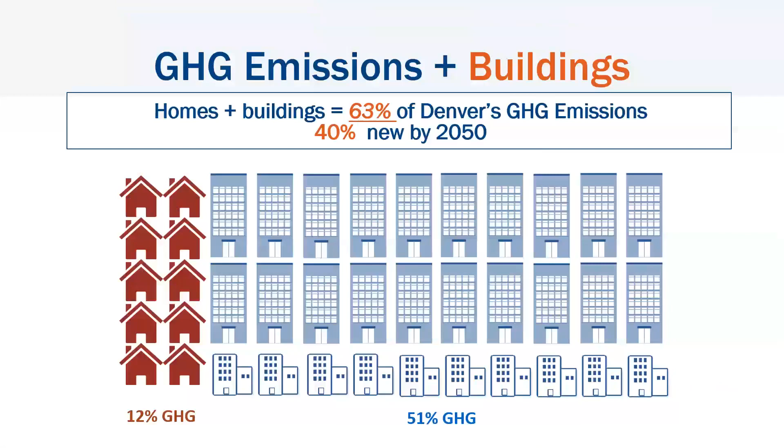Greenhouse gas emissions are central to that. We know that homes and buildings in Denver contribute 63% of Denver's greenhouse gas emissions, and we also know that by 2050, 40% of the buildings standing at that time will have been built between now and then. So we know that new buildings matter and that codes matter.

That's not to say that we don't also know that existing buildings matter or that cleaning up the grid matters. Those are two other efforts that our Office of Climate Action, Sustainability, and Resiliency are very actively taking on. We're just not talking about that today because the code doesn't really deal with that directly, but know that that's happening also. So as we focus on new buildings, the existing buildings and the grid are also being worked on.

Through our work, we are trying to get to a point where performance is considered from the very beginning of every project, when the site is being selected, alongside aesthetics. Not that it waits until we're part of the way down the road and we've gotten through most of schematic design or we've fallen in love with what the building's going to look like, but the performance is on the table from the very, very beginning.

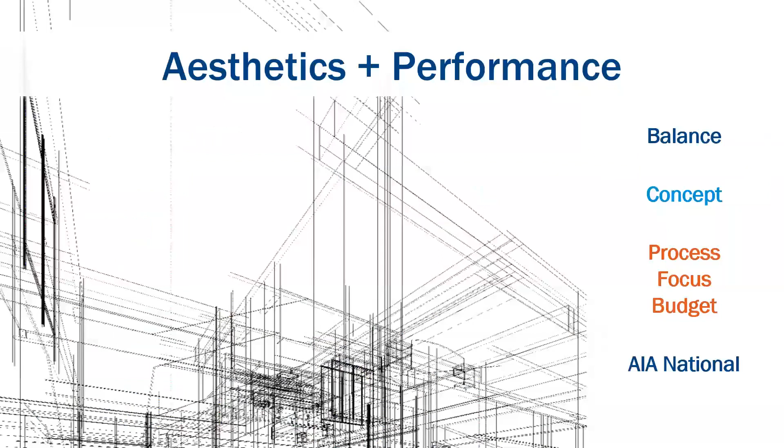That's not a new concept. That's something that the AIA tasked our industry with years ago and put into the Code of Ethics. We are just adopting that more strongly in Denver and more actively.

We know that regulations can't advance without the market advancing at the same time in tandem, so we have an ongoing dialogue with the community, and this will be an ongoing collaboration. I would say 200 times in a longer version of this presentation that we are doing this in conjunction with the community.

It's important to acknowledge the role of the Office of Climate Action, Sustainability, and Resiliency in all of the work we're doing. They do a lot of the work that creates the plans and sets the goals. They existed for years before now. At the beginning of this year, they got created as a separate office that reports directly to the mayor, but previously they were part of the Denver Department of Public Health and Environment and had the same team as the climate action team. There are 13 people, but they're growing, and the reason why they were broken out as this separate entity is because the community worked in direct conjunction with the mayor to make this happen, because climate matters.

The first thing the mayor did as a plan that got rolled out, he did 2 years ago now already, which was to roll out the 80 by 50 plan, a commitment on the part of our city to decrease our greenhouse gas emissions 80% below 2005 levels by 2050. That's a really high aspirational goal, and we are working towards making plans that will allow us to achieve that goal.

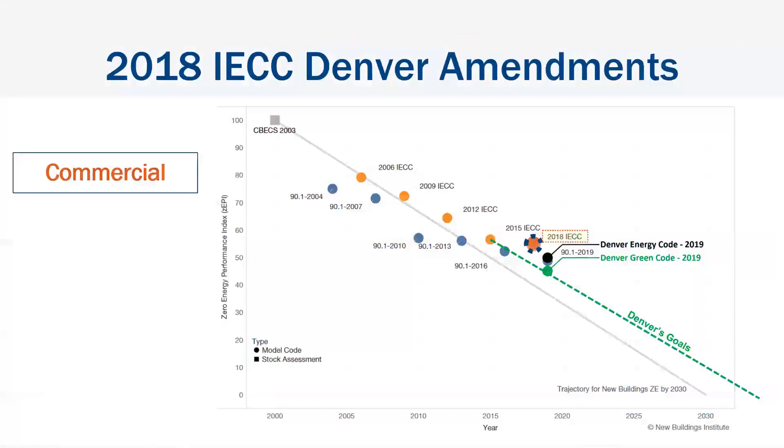We are focused on the building outcomes. We know that the design phase matters, the construction phase matters, but ultimately the outcome is what matters the most, right? It doesn't matter how a building is designed if it doesn't perform the way it's intended to perform. We're also focused on continuing to push forward with the Denver amendments to the IECC. This graph shows that the IECC at the national level is not on track with Denver's goals for commercial buildings or for residential buildings.

So we need amendments to pull the code in alignment with our goals. That is what we are doing over each code cycle. In this most recent code cycle, for the 2019 Denver amendments, we used it as a learning opportunity.

We worked with our committee, we looked at each amendment, we took the ones that the community felt were doable. We got to about 15% better than base code, and that's good, but it wasn't even enough to get us on our trajectory entirely. So we know in future code cycles, we're going to have to work to a goal. We'll have to look at each amendment, but we'll also have to know as a committee that we're working to a goal, and we have to figure out how the community can most painlessly do that and what resources the community needs to get there.

We're also using the voluntary green code to introduce to everybody the things that we think are most likely to be considered to be moved into the mandatory code in the next code cycle. So it's not only an opportunity for projects to show exemplary leadership, but it's also an opportunity for everybody else to see what's under conversation and potentially will impact all projects in the mainstream in the next code cycle.

So I won't go through any of the specifics related to the IECC amendments because that's what the rest of the 2 hours are for. We know what all of the usual suspects are that we have to target through our amendments. We know that we have 5 code cycles and that as new technologies come out on the market, we're going to respond to that.

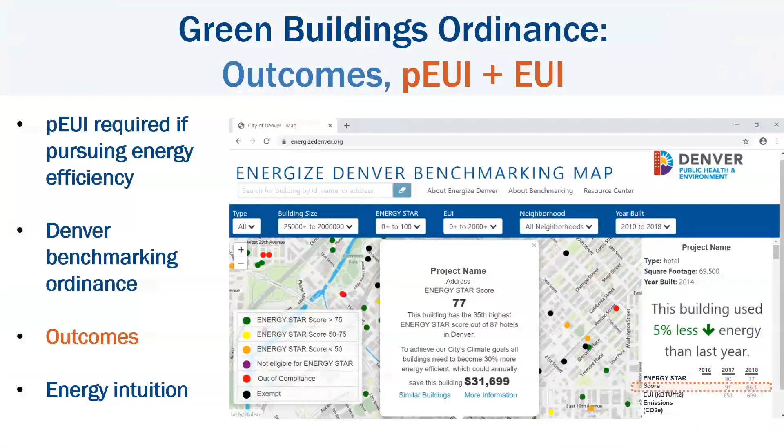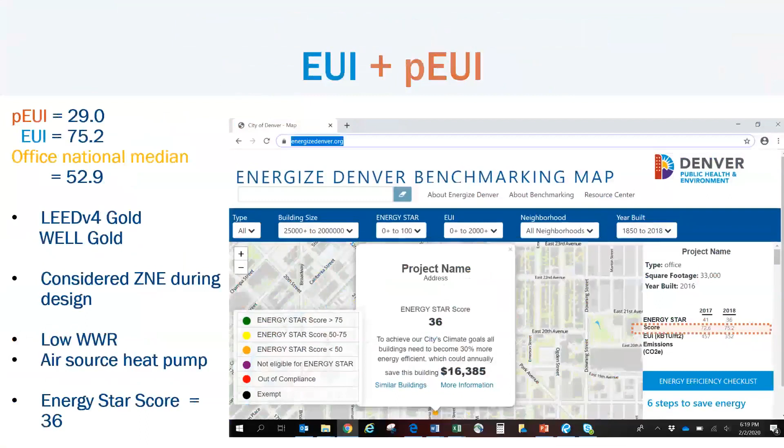We're using the Green Buildings Ordinance to start to have more conversation with our teams about predicted energy use intensity and actual energy use intensity on buildings because we really care about outcomes. The reason why we're doing this is because we want teams to develop an intuition about how their buildings are going to perform. We're seeing from anecdotal test cases that the predicted energy use of our buildings in Denver is generally a quarter to a half of the actual. So that's a big gap.

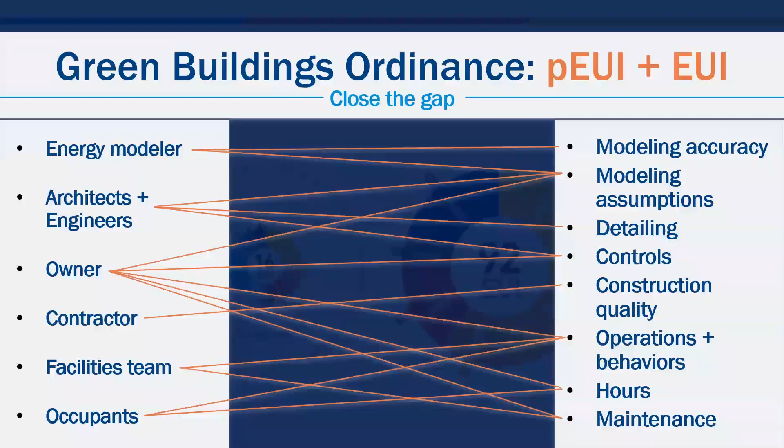That's not to say that teams are bad. There are a lot of factors that go into that. It goes from start to finish on a project, including the occupants. So we need to get everybody involved so that our buildings start performing as they're intended to. Ultimately, that's just for the base purpose of supporting the health and welfare of our citizens.

So then the last thing to say is just a reminder that we see equity, affordability, and sustainability as one goal. We're collaborating across a broad variety of departments and agencies within the city. The Zero Net Energy New Buildings Implementation Plan, getting all of our buildings to zero net energy by 2035, is one piece, but we're looking at bigger scale pieces at the site level as well, at the planning level. We are looking at existing buildings and neighborhoods and at the whole city level.

And we're looking to teams to have more focused conversation on energy, to start looking at metrics, to be accountable and responsible for the performance of projects, and for every member of a project team to get engaged in the conversation about how a building performs.

We're also looking beyond the code. So if there are things you're thinking of that other cities are doing, know that we're probably talking about them because we're talking about a lot of the other pieces that also impact and support higher performing buildings in a community. We're looking at planning opportunities, broad-based sustainability in the design of buildings, and ultimately how projects are going to contribute to the future of Denver as a viable community and a place where residents can live happily, healthily, and equitably.

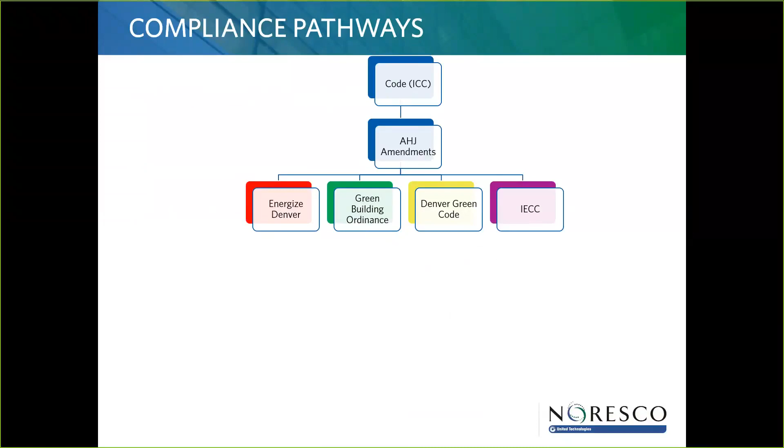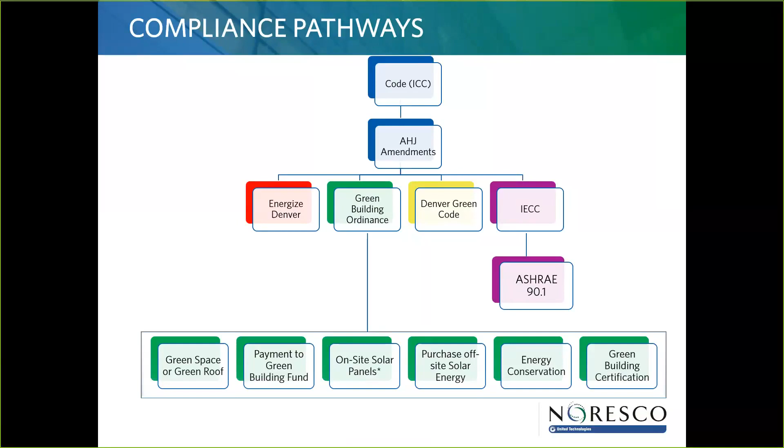I can get my screen to change, okay. So just a little snippet of what that looks like - you can see this tree starting to grow based on the different amendments or changes to these AHJ requirements. You can see Green Building Ordinance has several of its own, the IECC has ASHRAE, and if you go further out - I didn't put everything in here - you can see the tree starting to get pretty wide pretty quick.

There's definitely different pathways, so this is what trips people up quite a bit. We want to make sure no one intentionally tries to not follow the code, but I think where we get tripped up is there are so many pathways that it's hard to keep straight what pathways we're following and making sure we hit everything that's required.

The good thing with the City and County of Denver and their plans reviewers is that they only have to remember Denver and what Denver amendments are. The not so good thing for the rest of the architectural community is they'll have to remember all 300 AHJs' amendments, because they design in several different cities and counties. So it's a little bit more tricky for them, and keeping things straight is hard when you have more options.

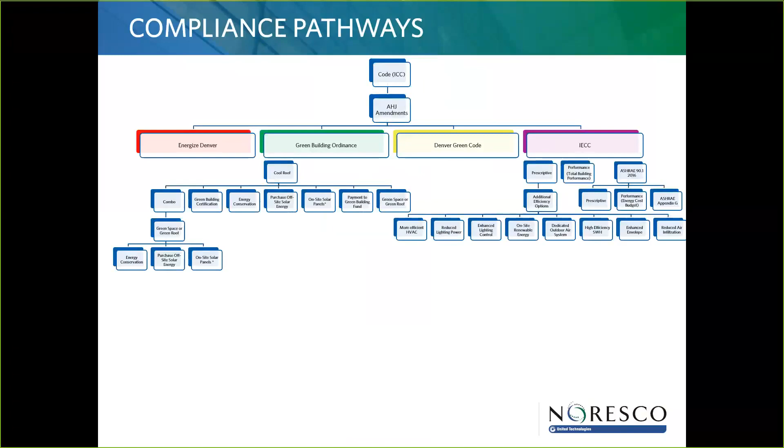So just real quick, on the Green Building Ordinance - we're not talking about that today, but you need to know some of this because it affects some architectural items in the code.

So here are the pathways. You have to have a cool roof plus one of those 7 options. Then you can see you can have a combo option, which breaks down even further.

Denver didn't do this on purpose. It just so happened this way. I think for the most part, Denver and their task force tried to line everything up as best as possible. But this is one item when you're looking at your roof SRI that could be a little bit different.

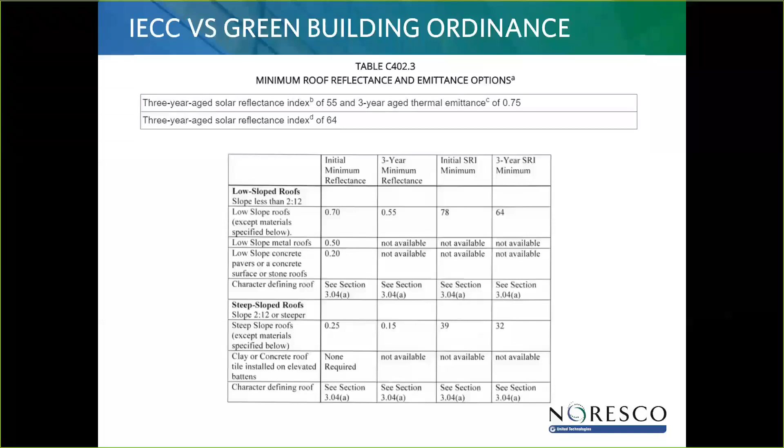So methods of compliance, in the IECC, there are 4 different ways to comply with this. I'm a visual person, so I'll just break it out here. They have to clearly be marked on the set of plans.

And the thing with new buildings is that whatever pathway is selected, that pathway then has to be followed for the rest of the life of that building. So say a building comes in for permit for core and shell, and they pick the ASHRAE Appendix G pathway. They then, for the rest of the life of that building, anytime they pull a permit, would have to follow Appendix G, the ASHRAE Appendix G pathway.

They can't jump over to, say, IECC or even ASHRAE prescriptive pathway. They have to follow the same pathway for the life of that building. And the reason for that is that not every pathway is created equal in terms of energy savings or energy consumption. And so if you start to mix and match these pathways, the building energy use or conservation of energy starts to go out the window.

You sometimes might be doing something better, but in the overall building might be taking a hit in energy consumption. So that's why City and County of Denver is going to require that the same pathway be followed for the life of the building.

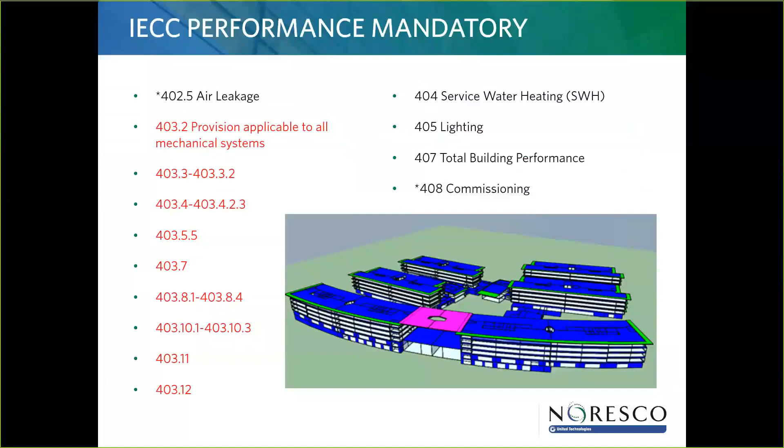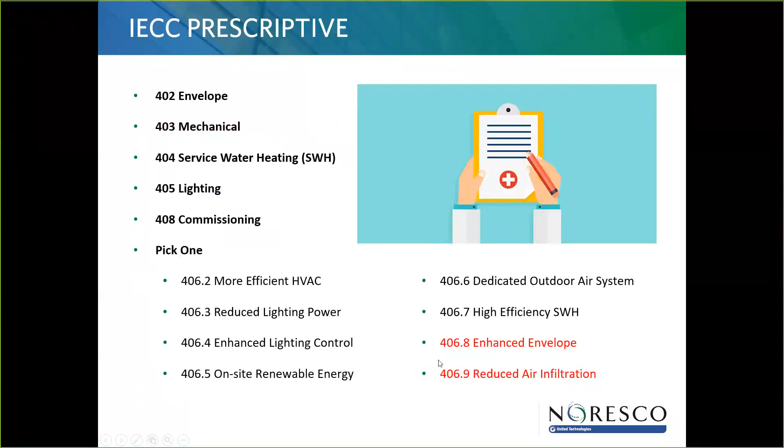So those are the sections we're going to follow. If you're looking at the prescriptive pathway, the items in red are the new items - enhanced envelope, or when I said Denver amended this 'pick one' section, you now have to pick two. Last code cycle had 6 options to pick from; this code cycle you have 8 options to pick from. And with Denver, you have to pick 2 of these 8 to do. We'll go into more detail on those.

All right, so let's jump into it. Let's jump into windows. We're in climate zone 5 here in Denver. So you can see if you look at the chart, there's different climate zones based on what climate zone you're in. Sometimes Colorado has more than one climate zone, but for City and County of Denver, we only have one climate zone, which is climate zone 5.

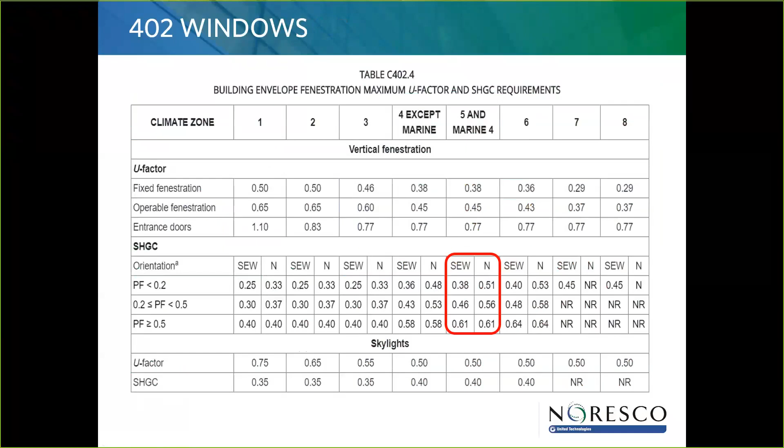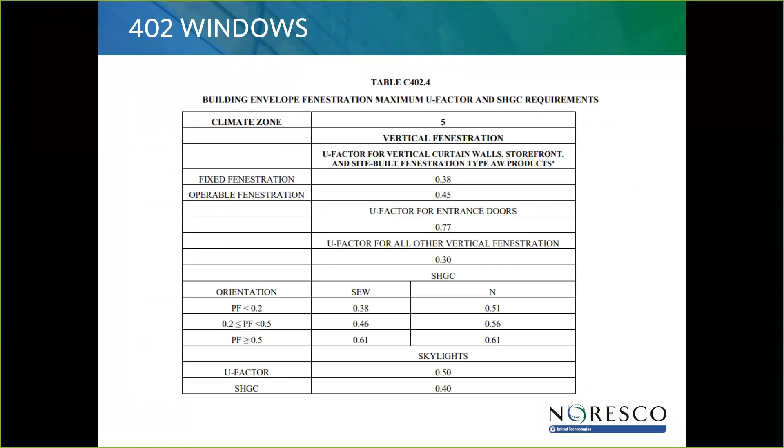The little red box there is all that's really changed from 2015 to 2018. Pretty simple change there. I will say Denver, in their amendments, did make this a little easier to read. So this is what the code shows you, this table. But what Denver did is say, let's get rid of all the other climate zones to make this easier for people - we don't want people to be confused. So this is the new table for City and County of Denver. They didn't make any changes to the table that were different per se than what we pointed out on the last slide.

So they're not doing a bait and switch or anything here, but there were changes from 2015 to 2018. Just so you can see the difference, here's a little chart - again, the red is what's new. You can see the difference between 2015 and 2018 IECC, it's just these things in red. In ASHRAE, nothing's changed. And then Denver made one amendment for entrance doors and other fenestrations. So hopefully this slide gives you a little update. I don't think the solar heat gain coefficient is going to be a deal breaker in terms of budget.

I think these solar heat gain coefficients were looked at pretty closely to make sure the industry has these windows and options readily available. It's not a premium option, because if we're going to require somebody to do above and beyond based on a Denver amendment, we want to make sure it's the biggest bang for the buck. You'll notice these solar heat gain coefficients are pretty readily available in the market to find.

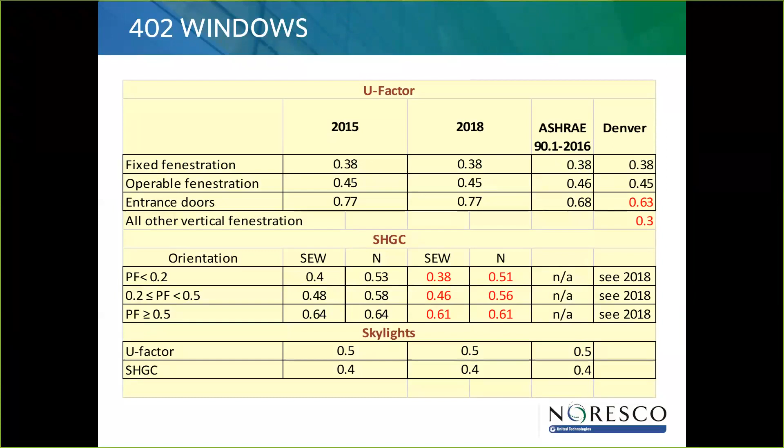I'm going to jump back to section 202, a little out of order, but it's in order for the presentation, to go over some definitions so we're up to speed. The red asterisk there shows Denver amended the definition a little bit here, and what they amended was the language of it.

It basically better defines what an above grade wall is. A wall associated with the envelope, 15% or more above grade, and on the exterior of the building, or any wall associated with the building thermal envelope that's not on the exterior of the building. So you can still have a thermal envelope that isn't on the exterior of the building, it could be on the interior. We want to make sure that's captured in the above grade wall definition.

So what that basically means is above grade walls, and spandrels, the spaces between floors, are now considered to be above grade walls. We need to make sure the insulation values there match what the above grade walls require.

This is a little bit different. If you think about balcony slab edges, those would technically fall into an above grade wall in some situations, which would then need to be insulated somehow. Just know that this definition change, being a little bit more clear, adds potential areas that will need to be brought up to an insulation R-value level that you normally wouldn't focus on from an architectural standpoint. Keep that in mind.

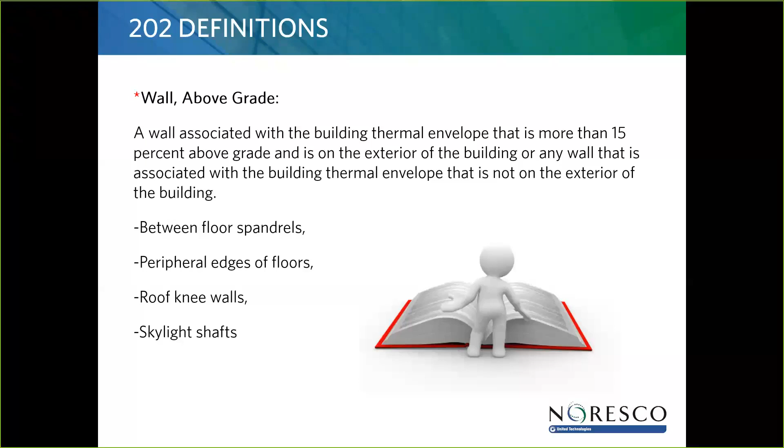The other definition I want to go over is Group R, multifamily. R2 is now considered commercial in the Denver Amendment definition. So no matter the size of multifamily, those are now considered commercial projects and have to follow the commercial provisions of the code in Denver. That's a big change.

Let's get back to the envelope and R values. Here are your above grade walls, the big table of different climate zones, climate zone 5. Nothing's really changed from the old code to the new code in terms of how much more R value you'd need in the wall. Just remember the definition of above grade walls changed, so some of those locations might need to be brought up to those R values. But the change from 2015 to 2018 is in that little red box, and that has to do with heated slabs.

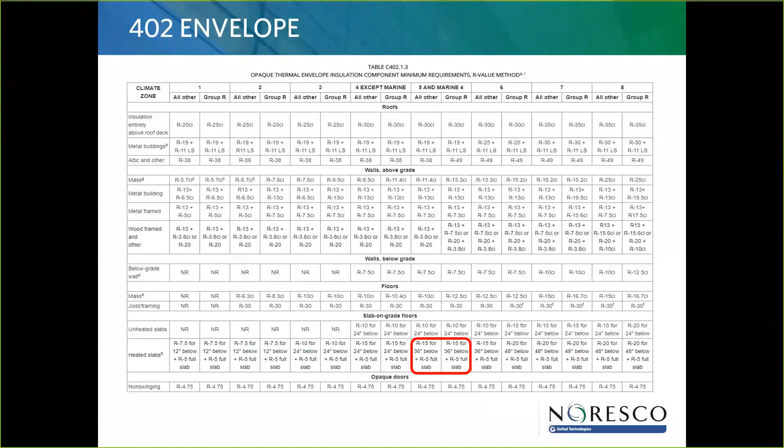Again, trying to make this a little simpler and easier for everybody to read. You can see the changes from 2015 to 2018, and then the changes from ASHRAE. Again, nothing's changed from one version to the next except for that heated slab, and Denver's amendments didn't change any of that. Just keep in mind that the areas that might need to be insulated have changed based on the definitions.

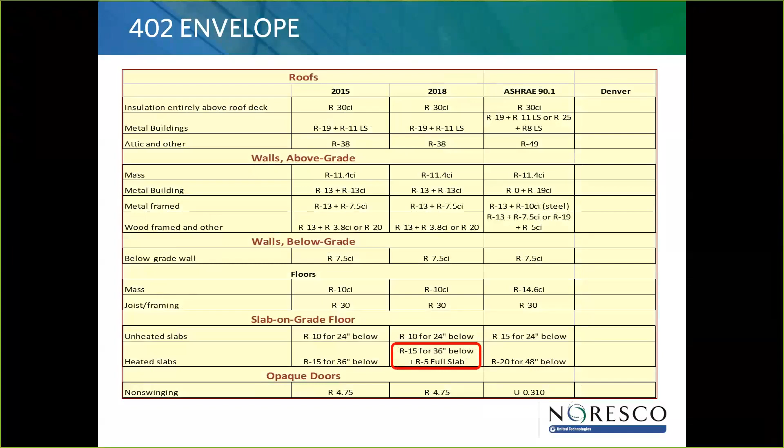Heated spaces between slabs and drop ceilings, like in a parking garage type scenario, have an amendment to them. Denver has amended this to add a section saying that if we have a space we're heating, because maybe there's a wet sprinkler pipe in there requiring a drop ceiling in the parking garage, and that space has to be somewhat heated, we want to make sure that's within a thermal envelope. Because we're using energy to heat that space, we want the envelope to keep that heat in and thus use less energy. This is a tricky space, so Denver has called this section out because of that.

So what they're saying is the slab must have a minimum of R5 insulation, and the plenum floor, so if you have drop ceiling tiles, must have a minimum of R19 insulation on top of that.

That will then suffice to be enclosing that soffit space, that drop ceiling space, within the building envelope. So it's a little bit hard to seal the drop ceilings, but you're more than welcome to make that your building envelope and try to seal that. But Denver's found that over the years, with maintenance going up there and checking things, or people popping their head up, or maybe leaks, that envelope kind of gets beat up and not put back in place. Same thing with some batt insulation laying on top of the drop ceiling. But it just needs to be installed there: R5 on the slab, and then R19 on the drop ceiling.

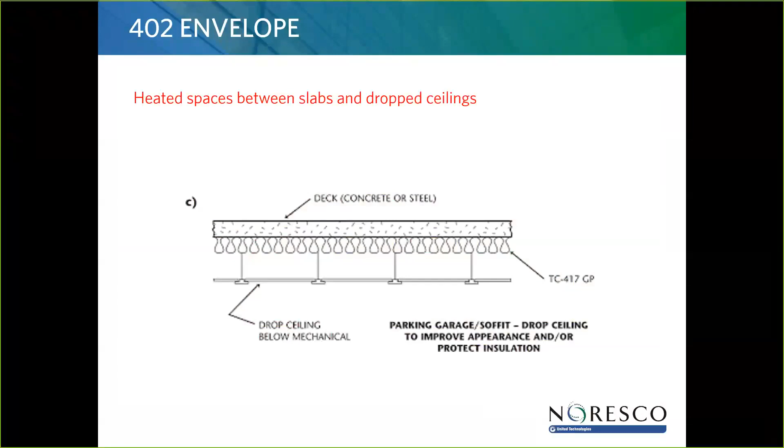This is a mechanical section, but it applies to architects because of the radiant floor heating insulation requirement. You might need to accommodate for that. You now need to have R3.5 anywhere you have radiant floor heating, so that might need to be something you incorporate in your plans or when you're planning your drawings. That's why this section is in here. So if you're following the ASHRAE path, no matter if it's Appendix G or prescriptive, you will have to have this in there.

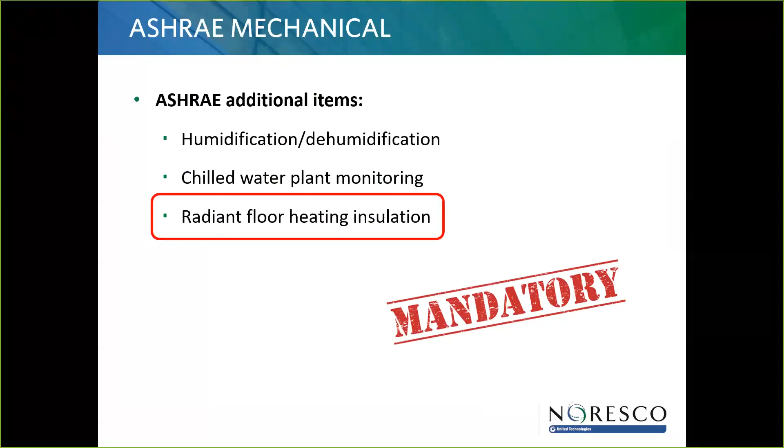Skylights. Skylight curbs before didn't have to be insulated previously, but now, because of the above grade wall definition and the change in the code, they have to be brought up to an R5. So just know that the curbs have to be insulated. And then any shafts that come up through the roof line there would be considered above grade wall, and then have to be brought up to the insulation value of what your wall R value needs to be. So changes to the code, and because of the change to the definition, some additional insulation requirements are now required on there.

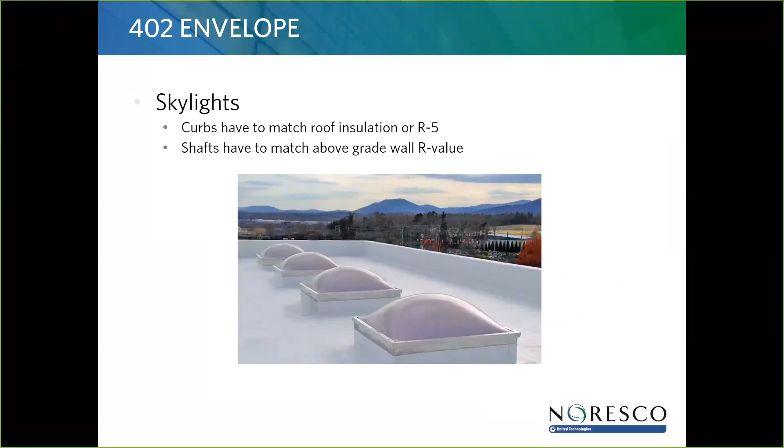All right, so let's talk about insulation on those walls. We know what our R value needs to be in our wall insulation. However, in order to try to reduce energy consumption even further, Denver made an amendment to reduce thermal bridging. If you have thermal bridging, you're allowing heat to transfer from the outside to the inside of the building via metal or wood studs, or some sort of bridge, if you will. Denver has amended a section to say if you're using Z-girts, you're going to get penalized a little bit because of thermal bridging.

Now, you can avoid being penalized if you do certain things, but what they're trying to do is eliminate the thermal bridge. So if you use vertical Z-girts, they're saying that whatever your wall R value is, you're going to decrease that by 40%, and that's going to be your effective R value of that wall. So say the R value of your wall has to be R13 - if you have vertical Z-girts, take 40% off that, and now you don't have R13. So effectively, you need to put more than R13 in that wall system to bring your wall system back up to R13. Same thing goes with horizontal Z-girts, except it's a little bit less of a penalty - instead of 40%, it's a 30% decrease in R value. But if you use intermittent Z-girts, then you don't have any penalty in R value.

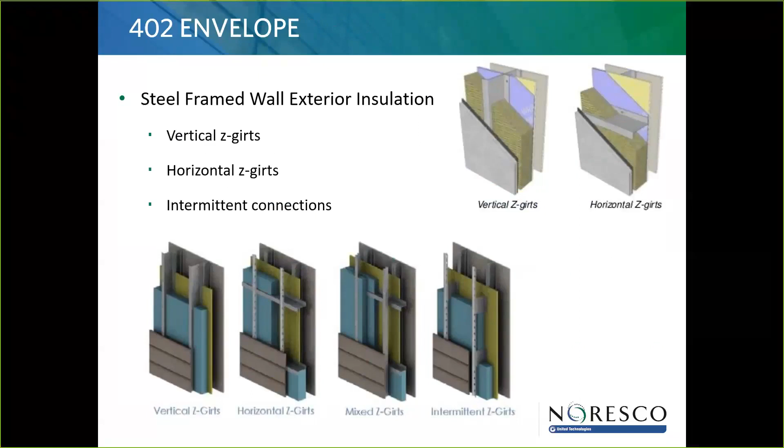All right, so that's basically, in a nutshell, the changes from an envelope standpoint. I will say that section 402, the envelope section in the code, is pretty small in comparison, in pages, to mechanical or modeling or whatever. But in my opinion, it's the largest effect on our energy consumption and energy use. And up until recently, people haven't thought about the envelope as being a contributor to energy usage, and so now we're seeing a lot more emphasis on that.

Our mechanical systems are getting to a point where we're getting as good efficiency as we can, given the technology, and the incremental steps of increasing efficiency are very small. So now our weakest link in our buildings is our envelope. Our mechanical equipment and energy consumption is only as good as our building envelope. If we're letting heated and cooled air in and out of our building because our envelope isn't airtight, we're not focusing on the right thing.

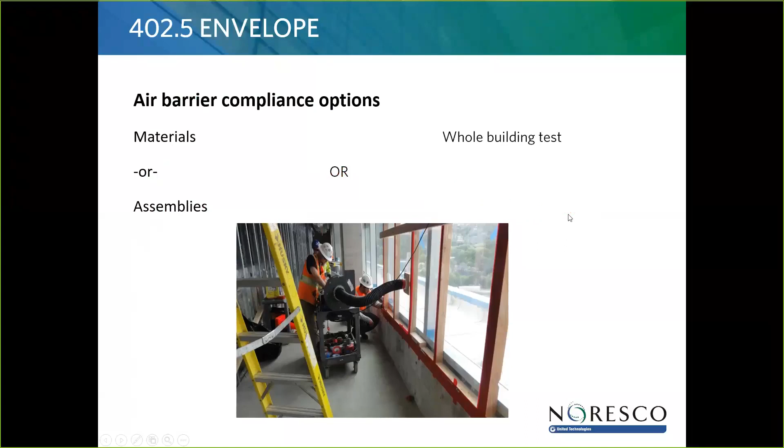So let's take a look at what that means. Materials or assemblies — you have to pick one of these options. Your materials for your air barrier have to meet the ASTM standard, or your assemblies have to meet the ASTM testing standard. So you can pick one or the other.

What I see doing from an ease standpoint is if your spec calls out that your air barrier materials are ASTM E2178, you meet this compliance option. But from a building performance side, that's probably not the best pathway. I'd say the best pathway is knowing that your building is performing to these standards, so your assemblies would test that — your roof-to-wall connection, your window-to-wall connection — those assemblies would be tested and meet a leakage requirement. So you have two options there.

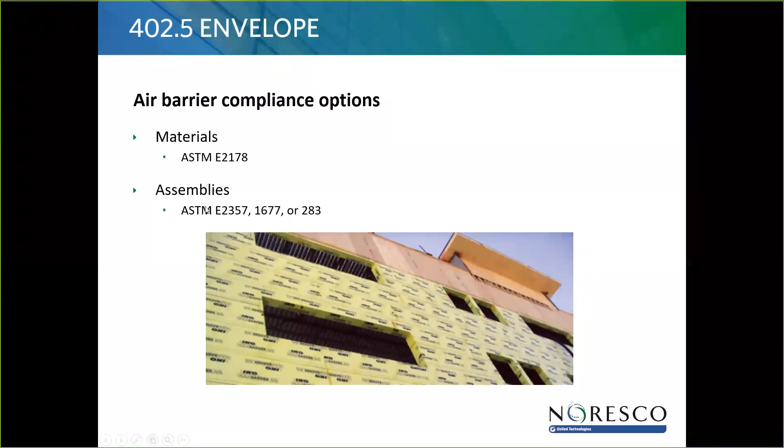Going back to this slide — materials or assemblies — and you would then have to do a whole building test. So let's go look at what that whole building test looks like.

So your whole building test, someone would come in, a third party or an approved agency, and set up a blower door test to see what kind of leakage the building has. This would be done after the building envelope is completed. That does no good if you're still missing one window that's not put in or something like that. The whole envelope has to be completed.

Now, it doesn't mean you have to have your facade up. You can still do your building envelope test without a facade up. And actually, I would recommend that, because if you don't pass, then you have an opportunity to address and fix that and get your building envelope where it needs to be.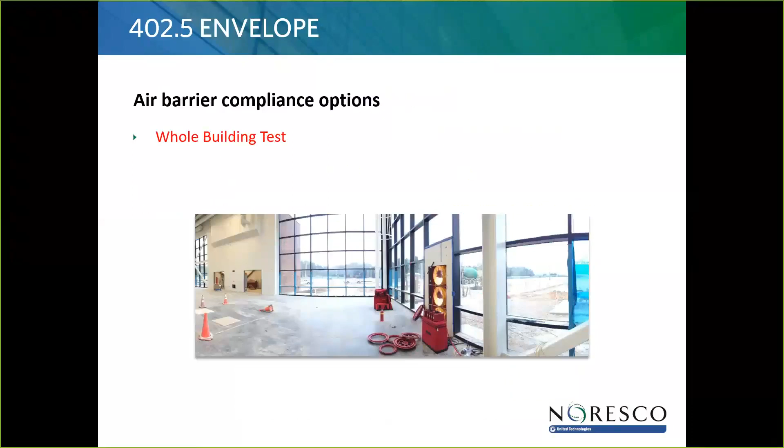So what's that whole building test look like? Basically, you're following another ASTM standard, and that standard says that you're going to pressurize the building to 75 pascals. That might not mean a whole lot to all of us on the phone, but basically that's going to tell us how much leakage is in the building envelope. City and County of Denver says that if your building leakage is at or below 0.4 CFM per square foot of envelope area, which is different than your floor square footage, then you have passed the Denver requirement for building testing. Remember, we had to do that and building testing option. So that's great.

0.40 is pretty achievable in my mind. I've done lots of building envelope testing, and I would say 0.40 is pretty achievable, especially with what I've seen here in Denver and the construction methods, where our contractors are a lot further ahead of technology and applications than say some other parts of the country. So I don't think, personally, that would be too hard to hit. Now that might sound scary if you've never done a building envelope test, but trust me, we'll do a little example here. You'll see that that's going to be pretty easy, or should be pretty easy.

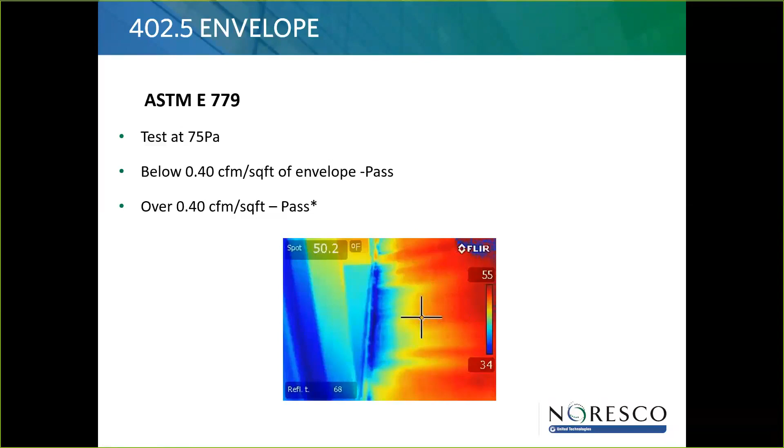Okay, so get out your pen and paper. We're going to do an example real quick. I'm going to give you some time. I won't give you much time, but feel free to open up the chat function too.

We'll spend maybe 4 or 5 minutes here. This example shows how much leakage 0.4 CFM is on a typical building. So we're going to calculate how much air leakage we can have on this example building. Remember, the Denver requirement allows us 0.4 CFM per square foot of envelope area. Go ahead and try the math. Once you find the answer, go ahead and chat it, and then we'll go through this step by step.

Here are the parameters: it's a 100,000 square foot building, the floor print is 250 foot by 100 foot, we have 12-foot tall ceilings, and it's 4 stories tall. Don't overthink this - we're not trying to be tricky and say, oh, there's space in between floors, or what about the concrete slab thickness. It's very straightforward, so go ahead and see what we got.

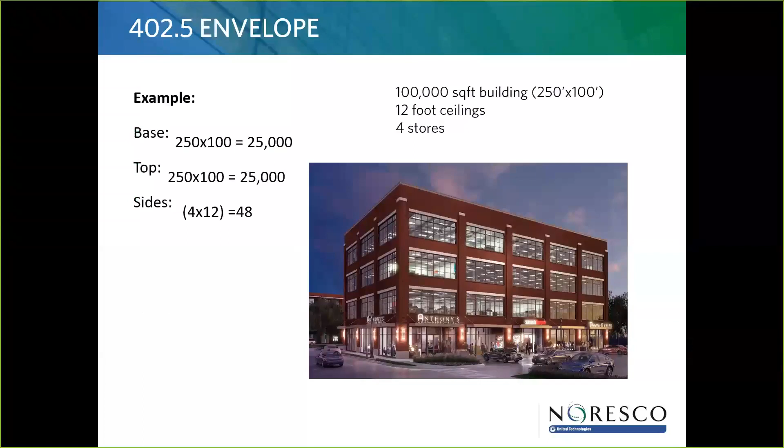So we take our envelope square footage and multiply it by that 0.40 CFM allowed by the City and County of Denver. That's the amount of leakage this building is allowed to have. So for those of you that had 33,440 CFM, that is the correct answer.

Remember when we were saying that 0.40 is pretty achievable, and sometimes that scares people? But on this simple building, we're allowed almost 34,000 CFM of leakage. Now, if you put that in perspective, one ton of air conditioning is roughly 12,000 BTUs, which is anywhere between 4 and 600 CFM.

So if you take 600 - let's take the big number, 600 CFM - and divide 34,000 by it, that's how much tonnage of cooling you might be leaking, that you're allowed to leak out of these buildings. The point here is not to do a whole bunch of math, but that this new requirement in Denver is very achievable and should be achieved fairly easily.

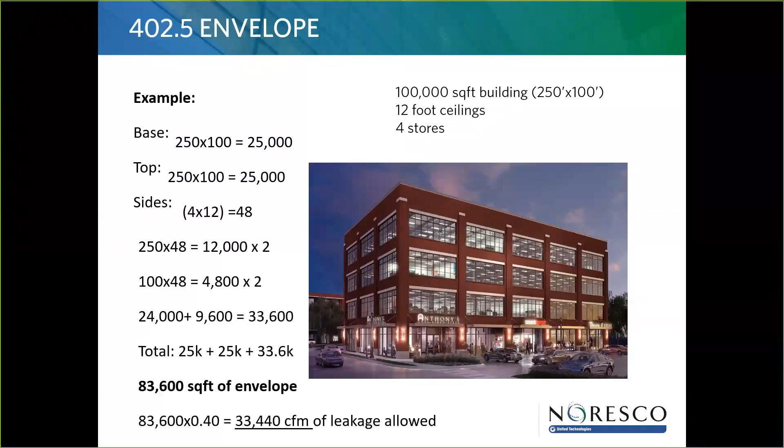So how do we know if our building design is already too leaky? What if we design our building and know it's going to leak 40,000 CFM? Well, that's not going to pass the test, so we better go back and look at what we need to change. What's cool is there's a nifty table and chart in the code book you can put in your specs, or if you're a building official, have handy on your desk when looking at drawings for a permit, to do a quick estimation.

So what if it was all curtain wall? Remember, our vertical envelope was 33,600 feet, and the code says a curtain wall system can't leak more than 0.06 CFM per square foot. So if the spec calls out curtain wall systems to be 0.06 or better, you can multiply that by your square footage of curtain wall area and know right off the bat how much your building envelope is going to leak.

So you can do that with all your assemblies and do a checks and balances before it even goes to the code official, or even before it goes to construction, to know if your building is going to pass this envelope test that the city and county of Denver is requiring. So all the tools are there for us to do our best, get the building envelope as good as we can, and pass this requirement for the city and county of Denver.

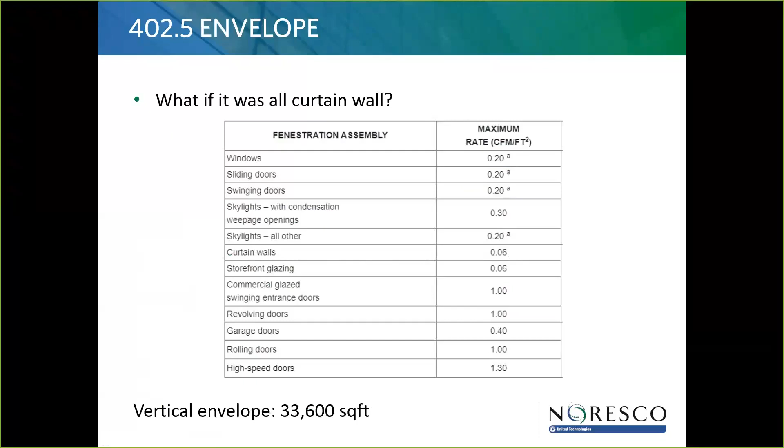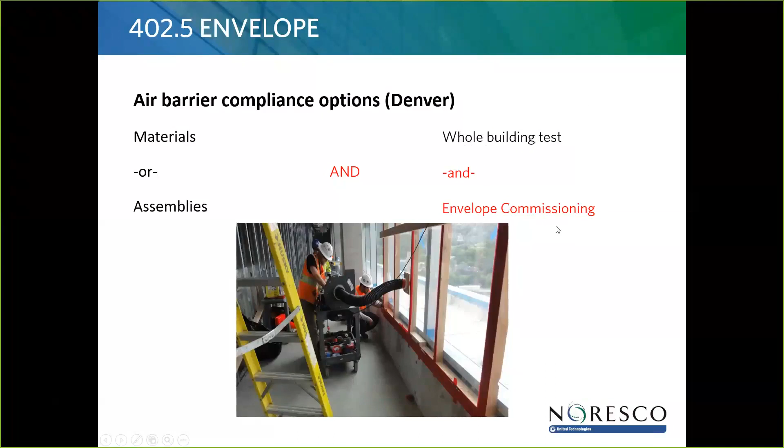Okay, great. So we went through the materials or assembly side and the whole building test that has to be done. Now we want to look at what the city and county of Denver has added to the requirement, where they now require envelope commissioning. Envelope commissioning is different than your whole building test, just keep that in mind. Your whole building test is actually testing the performance of your building. Envelope commissioning per the city and county of Denver's amendments is different than that. So we'll go through that.

City and County of Denver says envelope commissioning consists of three things. I put four here because they kind of lumped one of the items in with the final report. They say a construction document review has to be done, inspections during the install need to be done, and a final report needs to go to the city. In that final report, you have to have an issues log with any things found during the inspection and what corrective actions were taken. That's part of the final report, but it's an important item, so I put that as a separate bullet. Just know if you're reading the code by the book, they only call out three things.

Another thing to point out, they don't call it envelope commissioning, but that's just more common terminology. They call it building thermal envelope performance verification. So just know that more commonly is known as envelope commissioning, or if you want an acronym, BECX. CX stands for, capital C, lower x, commissioning. So BE is building envelope, commissioning, also known as that.

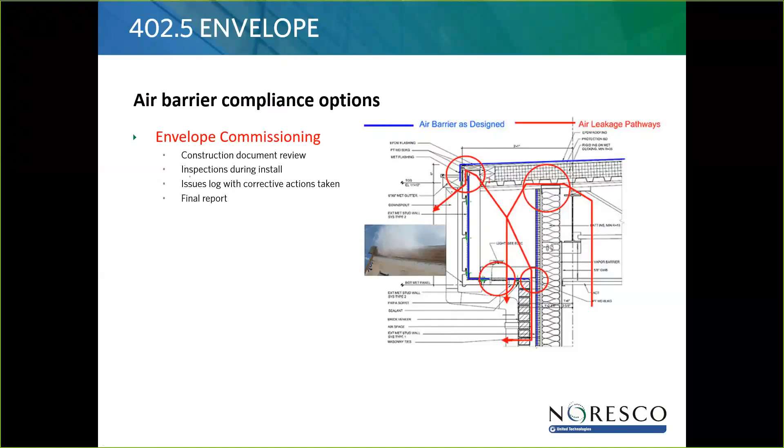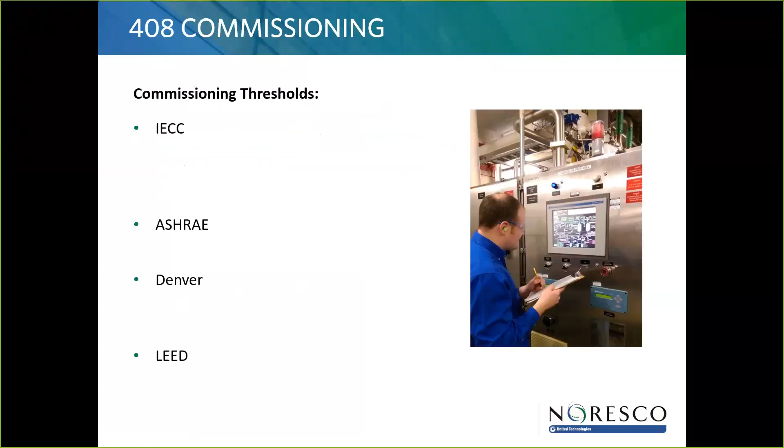So how do I know if commissioning is required? Well, we have several different pathways, right? We talked about that, that's that flexibility. We have the IECC, we have ASHRAE, we have LEED, we have Denver's amendments, things like that. So just know, from a building envelope standpoint, no matter which pathway you go down, either IECC or ASHRAE, Denver says you have to commission it from an envelope standpoint.

It doesn't matter on square footage. It doesn't matter on equipment capacity. This is more for your mechanical, electrical, and plumbing items. But what we're interested in from an architect standpoint is the building envelope and commissioning of the building envelope. So Denver is saying that you'll have to commission the building envelope no matter which pathway.

And if you're looking at LEED, if your building is following a LEED certification, just because it's going after a building envelope point, that's an optional point. So just because the building's going after a LEED certification doesn't necessarily mean it is meeting the Denver requirement for building envelope commissioning. So it's just something to keep an eye on.

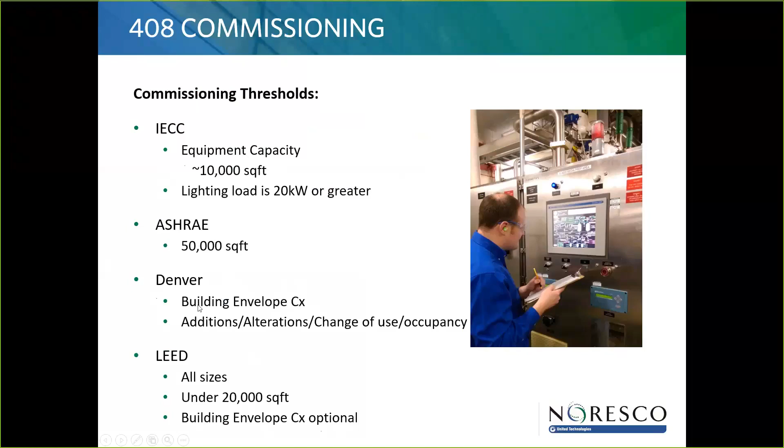All right, so required systems, just a point of reference on what needs to be commissioned. Envelope is one that we're looking at here, so that's why it's in here. But just know there's other systems that need to be required or commissioned besides the building envelope. That's not always going to be the same commissioning agent or commissioning firm that will do the building envelope commissioning along with the MEP commissioning.

Some firms have the capability of doing all of the requirements in-house. Others don't have the ability to do all of it in-house. So just know that just because you're getting a commissioning agent on board, we want to make sure that that commissioning agent is also covering the envelope requirements.

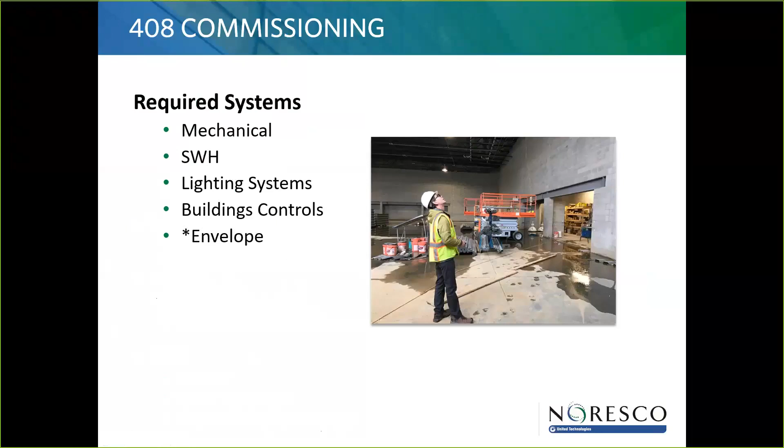All right, so we're back to this section, 402.5. That was a big section there. I said it was going to be a lot. We just went through this air barrier compliance option, this entire section. That's mandatory, remember, all of these are mandatory. We're just going over the asterisks because those are the new or the changes to the code.

So we've gone through this one, the materials and assemblies. Let's go through the last one here. We're getting close to wrapping up. Then we'll open it up for questions. But the next one is rooms with fuel burning appliances.

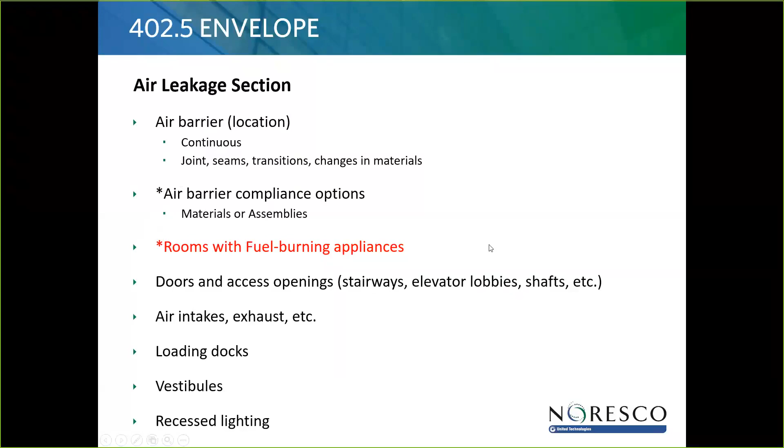So this is not new. However, it's been written a little bit clearer in the Denver amendments. And it's more closely related with the building envelope than anything else. So any space that has fuel burning appliances that brings outside air must be located outside the building envelope.

So remember, when we're trying to not lift up our pencil, sometimes it's easy just to go on the exterior of the building and encapsulate the entire square or rectangle, if we have a simple square or simple rectangular building.

This is a little bit different. This is saying that we're going to have to go inside the exterior wall and basically create that space outside of the building envelope. It's a little bit tricky to do. I think this is one of the sections where, on paper, it's super easy to draw, but execution in the field is a lot harder to do. So from an architect standpoint, you probably want to have a little more detail on this than others.

These spaces also need to be enclosed and isolated from other conditioned spaces. The idea behind this is that if we're bringing in unconditioned air through a wall louver, that's acting as the fuel or air for these combustion appliances, we don't want that associated with leaky walls. If this space is connected to an adjacent conditioned space, we have the potential for air leakage, unconditioned air leaking into that adjacent space.

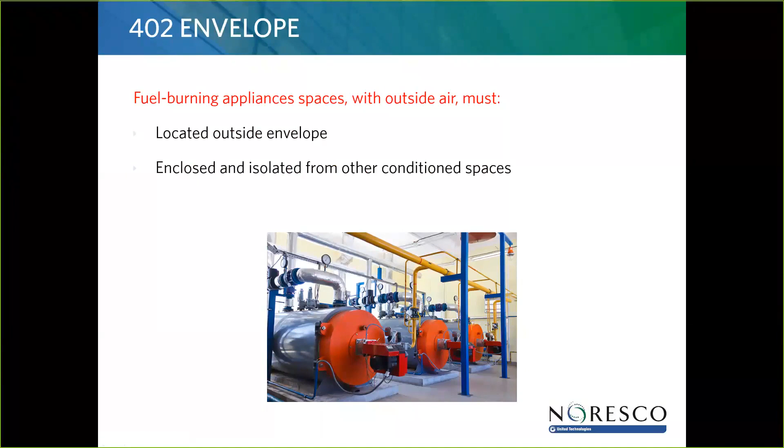All right, so let's jump into section 405. There's not a whole lot on there. This is electricity. So why do we need to talk about electricity for architects? Well, because of the amendment to the Denver Code, solar readiness needs to be part of your building now, and the reason we're talking about that is because it affects the structural integrity of the building. The highlighted portions here are probably the areas we want to focus on from an architect standpoint.

We probably don't need to worry about panel space, electrical panel space, or complying with the National Electrical Code, the NEC, from an architect standpoint. But what we do need to focus on is how much structure, how much load, we need to design for solar readiness, the amendment that Denver has made.

So, easy right? 40% of your roof area has to be solar ready, at least 40%. You have to design that area for a dead load of at least 5 pounds per square foot, and put that in your design calculations. The other thing that's tricky is you probably want to have something on your drawings, a pathway for your conduit and piping from the zone to the panel. You're going to have a roof penetration, so we need a detail on that and show the pathway.

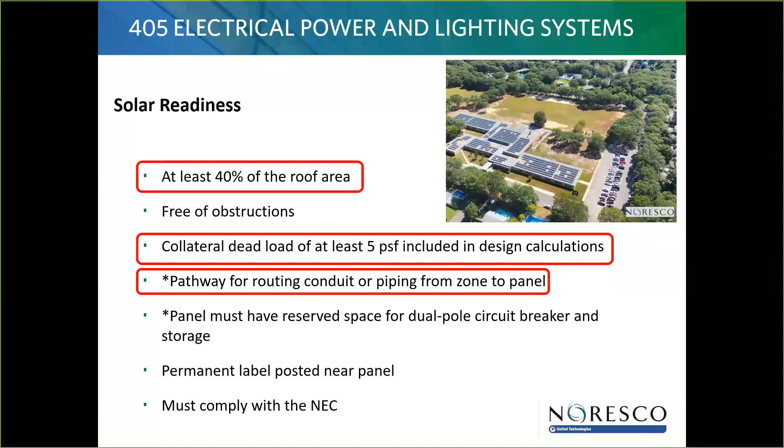Okay, so that's the Denver amendments on IECC. This is a cool project, this is actually Google Pearl Place, the project that I did. You can see the solar panels on the roof there, and it's an available roof area. So this is a good aerial view of what that means.

Available roof area - obviously these little dark rectangles here are the solar panels, but you can see here are mechanical penthouses, rooftop units and chillers. Same thing on this side of the building, and then you have a mechanical screen covering that. So your available roof area, you need to have walking pathways to get to the penthouses. You also need to have so many feet from the parapet or the edge of the roof from a fire safety standpoint. You should all be familiar with those distances and pathways.

But in this particular case, this is all the available roof area. So if we cut the building in half here, really our available roof area is only half of what the square footage of the roof is. Denver says 40% of the available roof area, so if some of this over here was available, that went into the calculation. You're going to need to do some calculations of what's available roof area and see how much square footage you need.

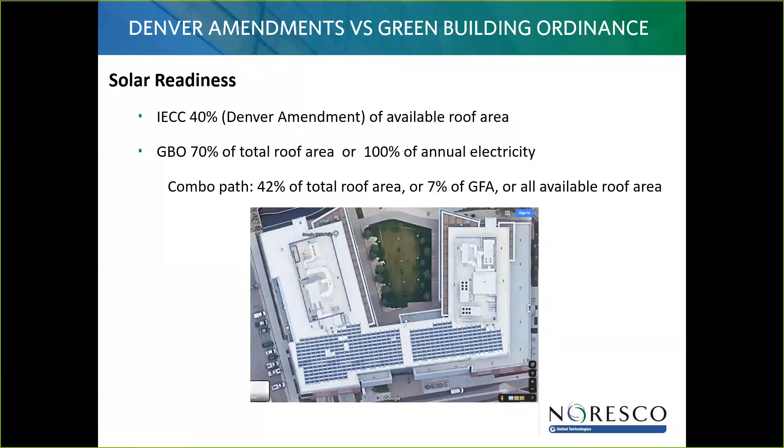All right, this is the last section that I'll cover on lighting, and I'm only covering this because the red is new, and from an architectural standpoint, what I want to focus on are your plans and zones.

From a lighting standpoint, we're starting to see zoning off of different compartments, offices, and areas like that. But zoning is going to be important to look at from a lighting requirement standpoint. You may or may not have a lighting person on board that does your in-house lighting design, or you may have that subbed out. But just know that your lighting zones, from an architectural or floor plan standpoint, will trigger either additional occupancy sensors or other requirements if your zones are larger than you thought.

So this is the 600 square feet or smaller kind of thing, and 300 square feet. Zones can't be larger than 600 square feet. If the new areas are less than 300 square feet, you don't need an occupancy sensor or vacancy sensor. So probably not something you need to worry about too much if you have a lighting consultant on board.

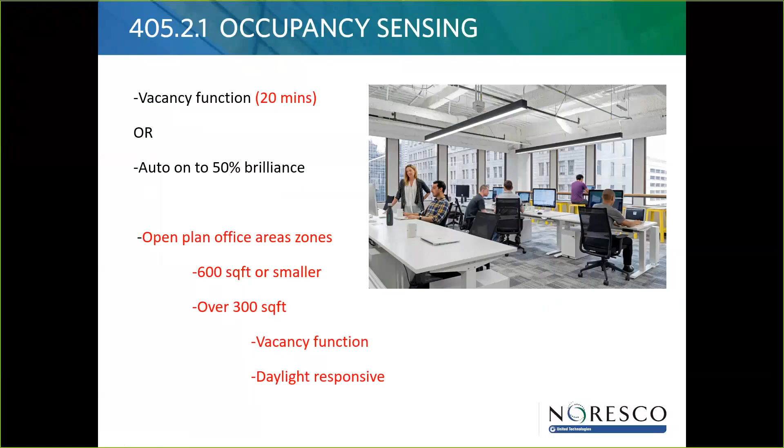All right, so here we go. This is, like we said, we're wrapping up. Here's that last category, section 406, where it said pick one. Remember, Denver amended this to say pick two. I'll say here are the three items from an architect standpoint that would be of interest per code. This is what the percentages are.

So on-site renewable is 3%. If your project is picking that, you might already be meeting that with your solar readiness or your Green Building Ordinance requirements. You might already be meeting that, and that might be a freebie.

But that's an option. Enhanced envelope performance, that's saying that your envelope, like your R value or your UA value of the building, is 15% better than code. So if you pick that option, that might be 15%. And then the last option, which is one of the two new ones for the code.

You know, the two red ones are new. It's saying that if your air infiltration is 0.25 CFM per square foot, you meet that requirement. Remember, City and County of Denver said you only need to do 0.40, but if you're lower than that, that might be a freebie. If you're at 0.21 CFM per square foot, hey, you just got one of your pick two options for free. So it'll pay to make sure your building envelope is tight. You could potentially have some free options here.